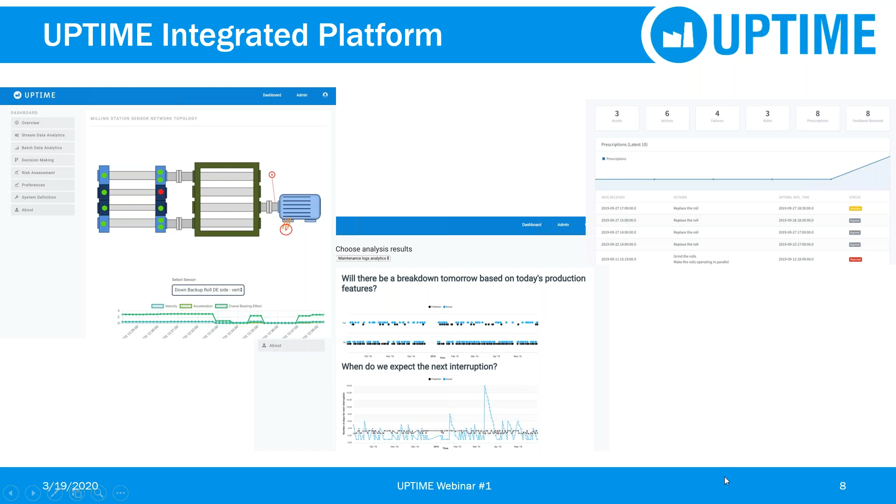The Uptime integrated platform has been deployed in 3 business cases: white good appliance, steel industry, and construction of production systems. The white good appliance use case deals with a complex automatic production line to produce drums for dryers. The equipment, as we'll see later in a dedicated presentation, is a sequence of different steps involving many operations and requiring the synchronized action of mechanical, electrical, hydraulic, and pneumatic tools.

The steel industry use case deals with cold rolling mill for the production of steel strapping. Cold rolling is a process of reducing the cross-sectional area through deformation caused by a pair of rotating metal rolls. The use case of FFT deals with the maintenance of manufacturing equipment within the aviation sector. FFT hosting equipment comprises a transportation jig used to move aircraft component wings during the assembly of an airframe.

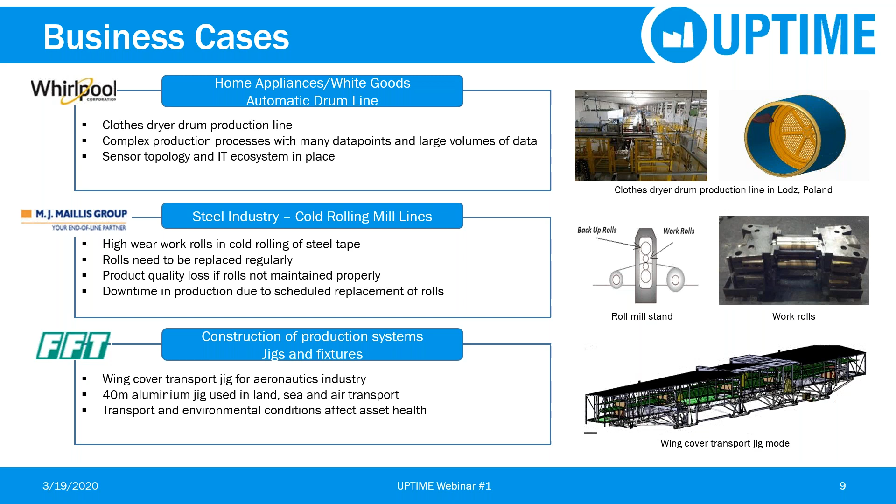Now I leave the floor to Pierluigi.

Good morning, everybody. I will show you the context and how Whirlpool prepared the use case for this project. Okay, a couple of words about Whirlpool.

Whirlpool is the major domestic appliance manufacturer in the world, with more than 21 billion in sales last year, and employing more than 92,000 employees worldwide.

Of course, Whirlpool is present in almost every continent, but has a strong presence in the European region, since we are hosting the European, Middle East, and Africa headquarters here in Italy, and we have factories in Poland, Italy, England, Turkey, and the Slovak Republic.

Also, we are a member of the World Class Manufacturing Association, because world class manufacturing is actually the way we use to improve our operations. Next slide, please.

That's actually a very brief and short description of what world class manufacturing is. It's a recognized worldwide methodology for continuous improvement in the factory, and of course it has a lot of different pillars to lay on. Many of those pillars have something to do with maintenance, so maintenance is very important for keeping our production system healthy and providing value. Among those pillars, next slide please.

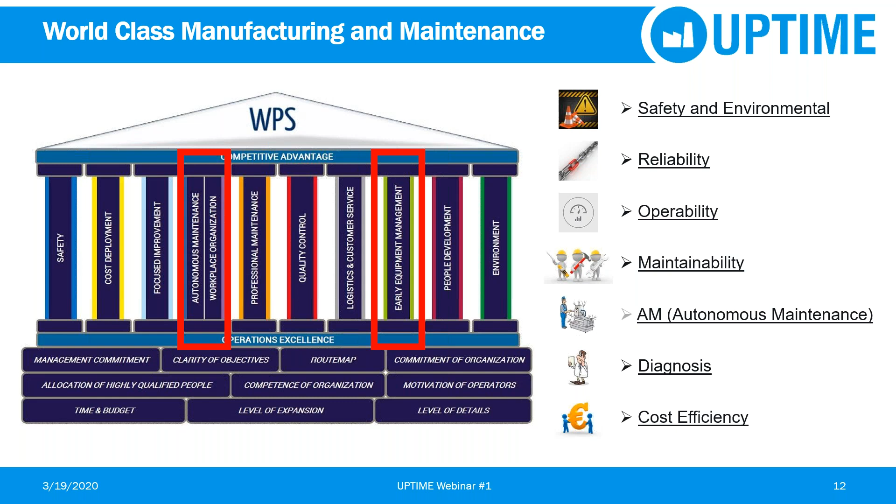There are 3 of them that are very important for maintenance. So maintenance must not be considered just for the last part, professional maintenance, but has to be built somehow into the workplace itself, with autonomous maintenance and the responsibility of operators for doing basic operations. Of course, it also has to take into account the design of the machine itself. So early equipment management tells us how to design, commission, install, and test the machine so that it could be actually maintainable in the future.

But of course, the most important pillar for world-class manufacturing is professional maintenance. Next slide, please.

What is the objective of professional maintenance according to world-class manufacturing? It is, of course, to keep machines and equipment efficient enough by eliminating breakdowns and reducing component replacement frequency, which means actually reducing cost.

The need is, of course, to make sure that our equipment is always there to produce at the right time, the right part, so without defects, at the right cost. And of course, the objective is to have 0 breakdowns, so machines working without any break during their availability time, but also to increase technical availability, so the machine works more if needed. And most important, reduction of maintenance cost.

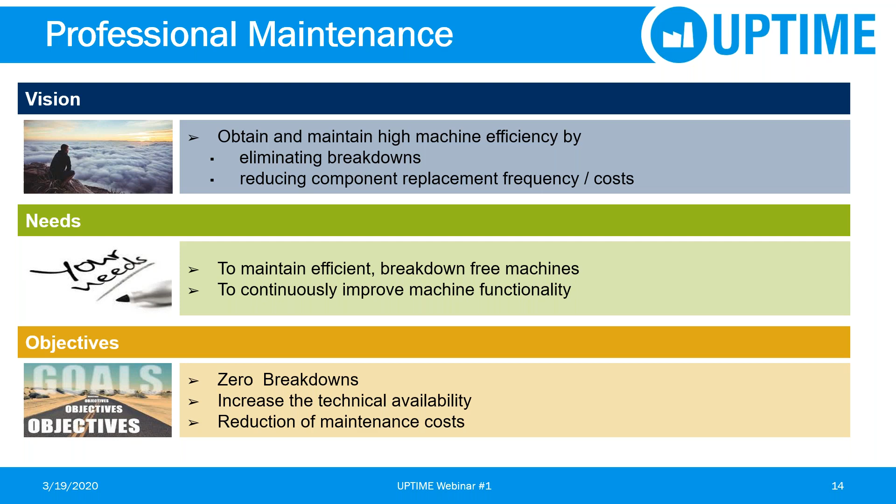Every pillar in world-class manufacturing is divided into 7 steps. Those are a description of 7 sequential activities to reach excellence. As you can see, broadly speaking, we can divide these 7 steps into 3 phases. One phase which is reactive, and for maintenance it is of course to react to something which is happening. The machine is broken and the maintenance is doing something. Then there is the preventive approach, in which I can do something before it happens, but just based on experience, just based on scheduled activities.

The most evolved step is, of course, the proactive. And the proactive part is exactly step 6 of the professional maintenance pillar, and it is prescribing a way to build a predictive maintenance system. So this is to tell all you attendees that preventive maintenance, predictive maintenance can't be simply built over the desert. So we need to have a continuous improvement of our organization, skills, process, procedures, and so on, so that it can be applied in the most efficient and effective way.

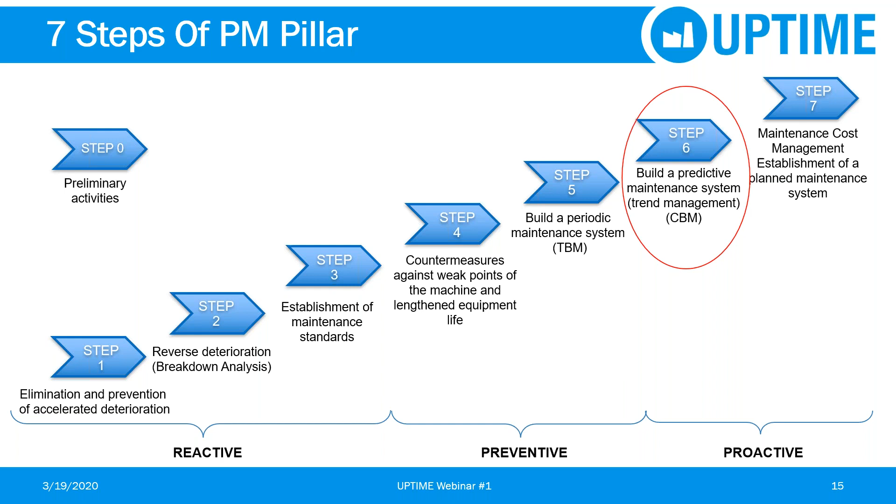So predictive maintenance is just one of the potential maintenance types that we can have. The most common one is breakdown maintenance, reactive. So act when the machine is broken. Actually, predictive maintenance is something that requires a lot of effort, a lot of technicalities, a lot of skills, and not all the machines. You can decide where it's convenient to apply different kinds of maintenance. For machines which are not in the critical path, for those producing parts which are not a big value, sometimes breakdown maintenance is also the one that can be applied.

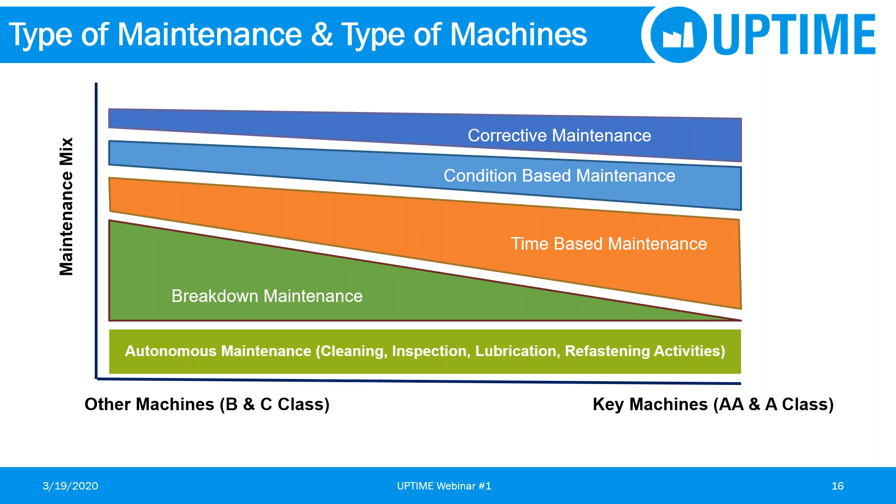However, for machines which are very important, the ones providing more value to your factory, the ones which are the most important part of losses, so classified as AA or A, of course, the amount of time-based maintenance, which is preventive maintenance, and condition or corrective maintenance, which is actually the predictive, has to take more than half of the mix. So it's important to choose the right machine and the right way to implement predictive maintenance.

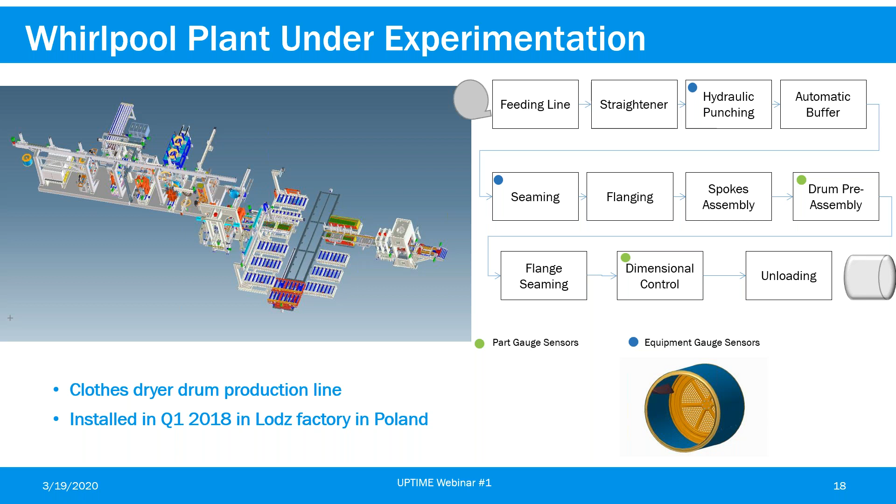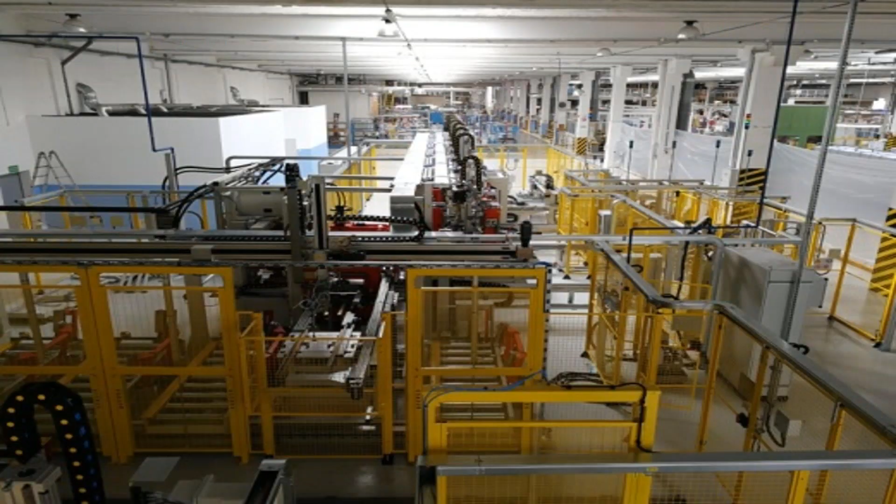We decided to concentrate the study on some of the workstations. Not all the workstations have been involved, but of course the machine has to be considered in its entirety. In the next picture, if you can scroll the presentation, you can see some shots of the machine itself, just to let you understand the dimension and the complexity, the amount of different actuators and sensors that are over there. So it's really a complex machine and quite a big one.

Okay, so the status before Uptime for the maintenance was, of course, we were not yet at step 6 of the professional maintenance pillar. We were somewhere between 4 and 5. So all our maintenance activities were reactive maintenance, of course, and some preventive. The preventive maintenance was done according to what we call the equipment ledger, which is simply a list of all the components of the machine. And for each component, there is a prescription of when the component has to be checked or substituted. So that was our initial point, and that's what we started working on in the Uptime project.

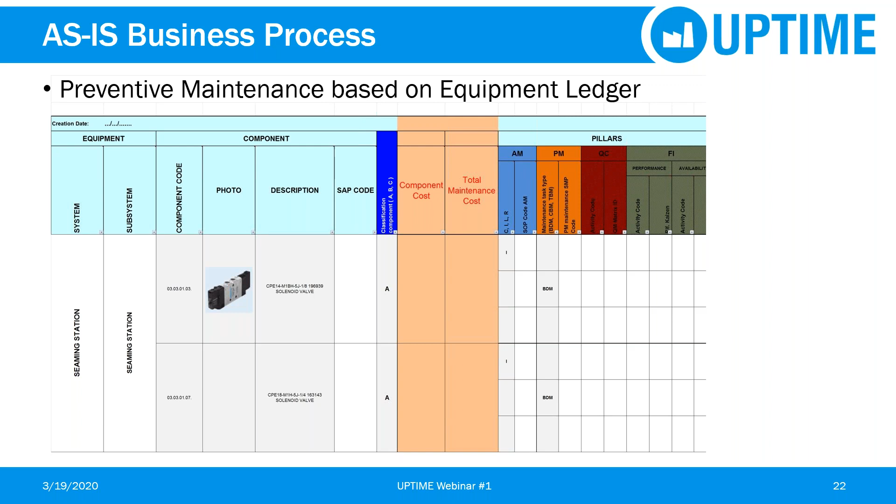Now I leave the floor to Fenareti and Emanuele, who will describe how Uptime implemented the Whirlpool case, and will also provide you a live demonstration of the platform itself.

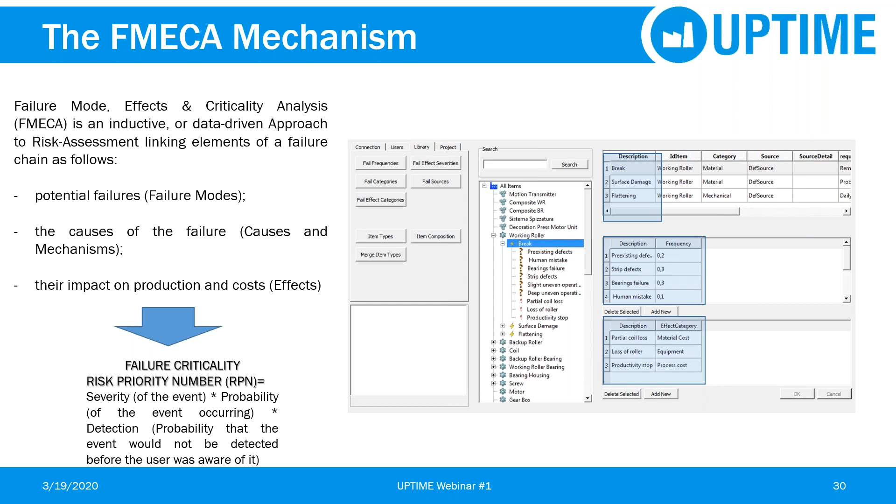Yes, the FMECA. Next slide, please. It is a systematic methodology to compute risk on the basis of failure mode of the failure and the impact on production and cost. Not only production and cost, but also safety, environment, and reputation. Each risk priority number associated to a specific failure mode is a function of the severity of the event, its probability of occurrence, and also the detection. And this detection is due to mitigation measures. Next slide, please.

The UPTIME FMECA goes beyond the state of the art, including the analysis, introducing simplified modeling to provide insight to the prediction part, and including the analysis of human error. Next slide, please.

Why perform FMECA? Besides traditional benefits associated to FMECA, such as increased reliability, safety, and quality, by introducing the FMECA in the operational phase of the system, we can evaluate the risk of failure during the entire system life cycle. And we can also update the FMECA parameters with information measured on the field in order to create dedicated statistics about failure.

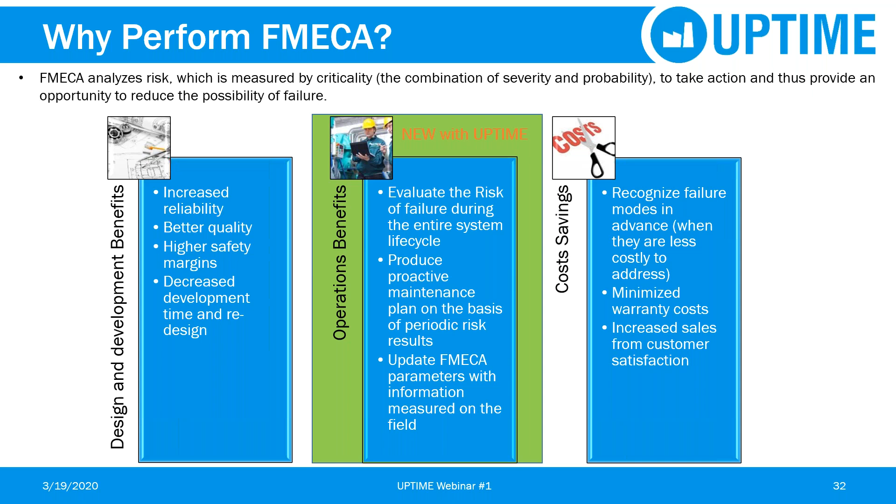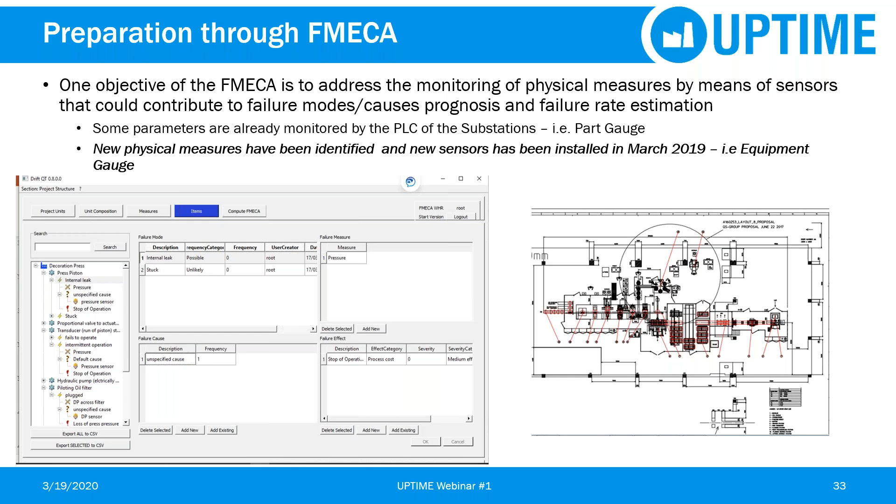Next slide, please. As Fenareti previously said, one of the objectives of FMECA is to address the monitoring of physical parameters by means of sensors in order to detect specific failure modes. The FMECA workshop conducted in March 2019 has been used to identify sensors to apply to some machines in order to detect anomalies linked to failure causes. So next slide, please.

Yes, after the installation of the sensor on the decoration press, a press model has been created considering both data coming from the new sensor and also data coming from the existing PLC. The resulting model, based on the worsening coefficient, can be used to provide insight to associate anomaly to possible failure mode.

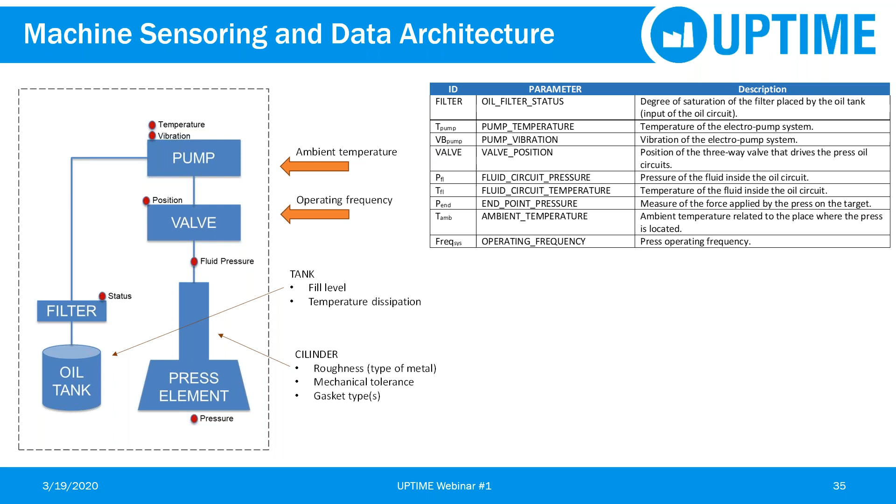Now I leave the floor to Fenareti.

So upon seeing the rationale behind the new sensor installation, we will see now how the different sensor data coming from product measurements and the machines were brought together in order to lead to certain predictions related to predictive maintenance.

Excuse me, Michelle, we should see one slide. The next slide, please. And then we will move to the video. There's a bit of delay, but you should see the slide now, Fenareti. Thanks. I'm still seeing the previous one, but it doesn't matter.